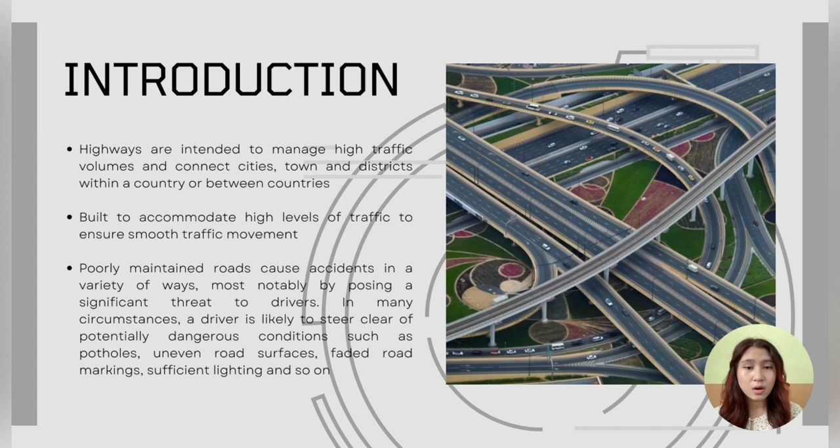But as we all know, damage to public transport infrastructure can impede its efficient operation and contribute to traffic accidents. Poorly maintained roads cause accidents in a variety of ways, most notably by posing significant threats to drivers. In many circumstances, a driver is likely to encounter potentially dangerous conditions such as potholes, uneven road surfaces, faded road marking, and insufficient lighting. These flaws can cause harm and make driving conditions hazardous.

A wide range of materials are employed in the construction process of road highways, and these are examples of construction materials for highway roads. Asphalt, commonly known as bitumen, is the most frequent substance used for highway roadways. It is preferred for highways due to its durability, flexibility, and low cost.

Other than that is granular subbase, which is a naturally occurring or man-made building material used as a road subbase layer. Granular subbase works as crushed aggregates used in a granular form above the subgrade layer beneath the base. Next is cement stabilization. It is particularly beneficial for coarse grained soils, mixing subgrade dirt with cement and water to strengthen its strength.

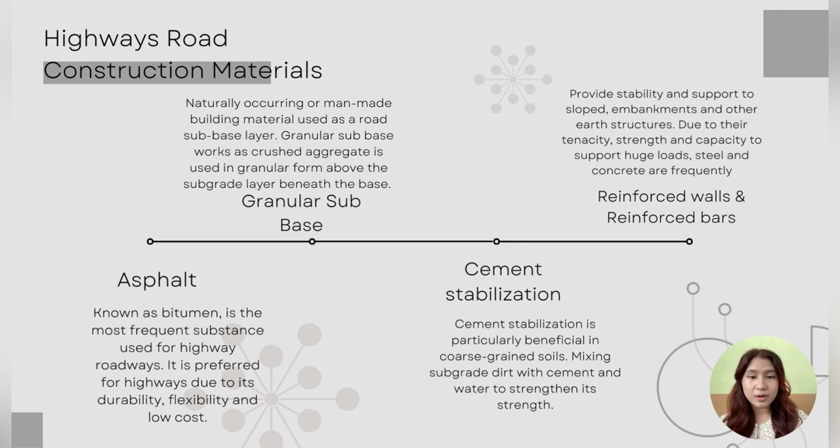Next is reinforced wall, which are construction materials that provide stability and support to slopes, embankments, and other earth structures. These walls are normally made up of three parts: fixing material, reinforcing element, and backfill materials. This boosts the tensile strength and crack resistance of the concrete, as reinforcing steel rods or rebars are placed within the concrete.

For this slide, highway infrastructure innovation relates to Sustainable Development Goal (SDG) strategy. Highway infrastructure plays a vital role in achieving sustainable development goals by contributing to economic growth, social well-being, and environmental sustainability. Here are some highway infrastructure innovations that relate to SDG strategy.

Firstly, sustainable material. The use of sustainable materials in highway construction such as recycled aggregate, reclaimed asphalt, and environmentally friendly binders contribute to SDG 12, responsible consumption and production. This material reduces resource consumption, minimizes waste generation, and promotes circular economy principles.

For the second point, energy efficient lighting: incorporating energy efficient lighting technologies such as LED lights in highway infrastructure helps achieve SDG 7, affordable and clean energy, and SDG 13, climate action. LED lighting consumes less energy, reduces greenhouse gas emissions, and improves visibility and safety on the road.

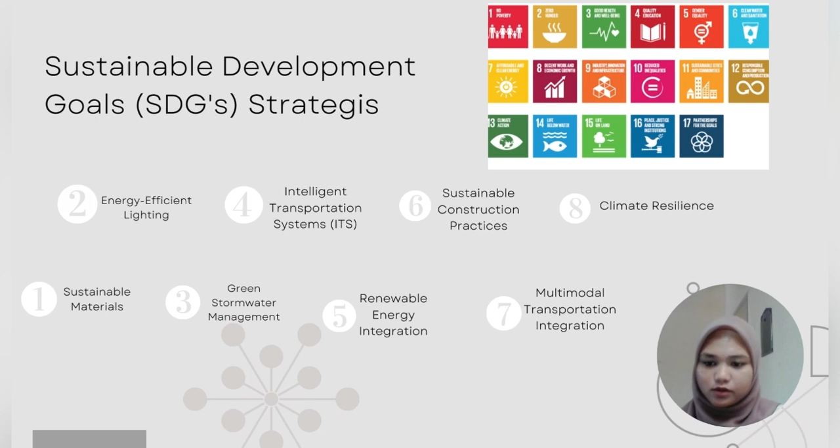Next, green stormwater management. Implementing green stormwater management techniques such as bioswales, rain gardens, and permeable pavement support SDG 6, clean water and sanitation, and SDG 11, sustainable cities and communities. This technique helps filter and treat stormwater runoff, reduces water pollution, replenishes groundwater, and enhances urban biodiversity.

Number 4, Intelligent Transportation System (ITS). Deploying intelligent transportation systems, including smart traffic management, real-time information systems, and vehicle-to-infrastructure communication, contributes to SDG 9, industry innovation and infrastructure. ITS improves traffic flow, reduces congestion, enhances road safety, and optimizes transportation efficiency.

For point number 5, renewable energy integration. Integrating renewable energy sources such as solar panels and wind turbines into highway infrastructure aligns with SDG 7, affordable and clean energy, and SDG 13, climate action. Renewable energy generation along highways can power infrastructure facilities such as lighting, toll booths, and electric vehicle charging stations, reducing reliance on fossil fuels.

The advantage and main characteristic of thermoplastic road marking in Malaysia, we have 3 main characteristics. First, robustness. Thermoplastic marks stand up well to high traffic, harsh weather, and wet conditions. They are made to survive Malaysia's tropical climate and keep their visibility for a longer amount of time.

Second, retroreflectivity. The thermoplastic material has retroreflective qualities because glass beads are integrated into it. This means that the mark reflects light back to the motorist when headlights or other light sources illuminate them, improving visibility at night or in low light.

Lastly, quick application. Because thermoplastic marks can be melted and applied with specialized equipment, they may be applied more quickly than traditional paint. By doing this, installation-related road closures and traffic jams are reduced.

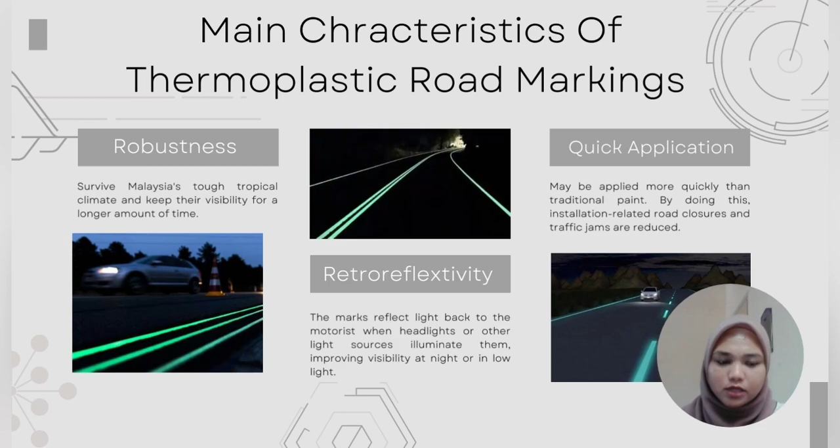Now I can explain about reduce, reuse, and recycle. Reduce: first, use solar or LED powered lighting systems with low power for the glowing line. This solution uses less electricity, lowering energy costs and having less impact on the environment.

Second, employ efficient design. Strategically place and space the luminous line to maximize visibility while reducing their overall length and material usage. The resources needed for installation and maintenance are decreased as a result.

Reuse: first, reinstallable material. Pick luminous line components that can be quickly removed and replaced in case road adjustment or repair are required. This enables the reuse of the same material rather than their replacement and disposal.

Recycle: first, give priority to use of material that can be recycled after their useful life. For instance, use material like metal or plastic that can be turned into new goods, eliminating waste and fostering a circular economy. Second, implement infrastructure and procedures for the collection and recycling of glowing line material once they have reached the end of their useful life.

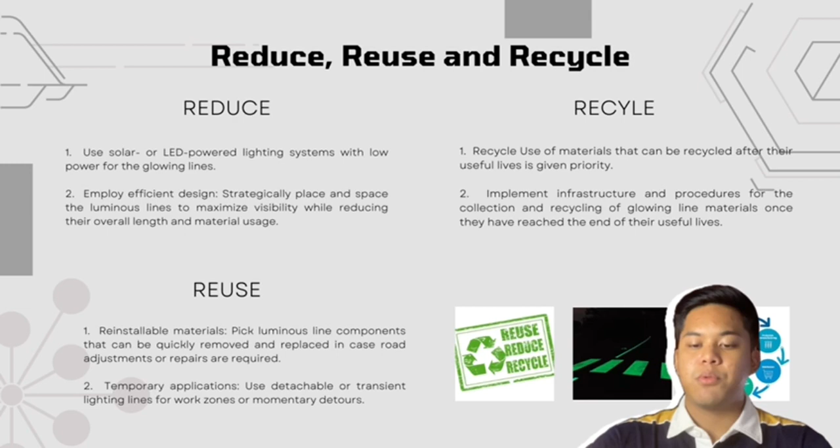This makes sure the waste is disposed of properly and promotes recycling the resources for later use.

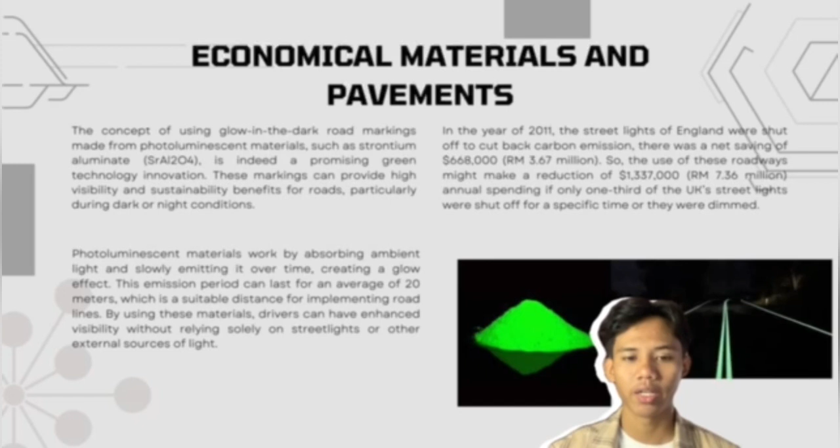For economical materials and pavement, which is MT3, the green technology innovation is to have road markings that are highly visible, eco-friendly, and can bring sustainability as well.

A glow-in-the-dark material is convenient for having the unique capability to emit light long after the excitation has ended. By using strontium aluminate compound, glow-in-the-dark material, also known as photoluminescent, can be obtained. The composition for the photoluminescent material is formed from the composition of alkaline earth aluminate.

Photoluminescent material absorbs ambient light and then slowly emits light. The average visible light emission period is in an acceptable range, which is 20 meters. This is a suitable distance to implement the road line because of the high visibility on the road during dark or night.

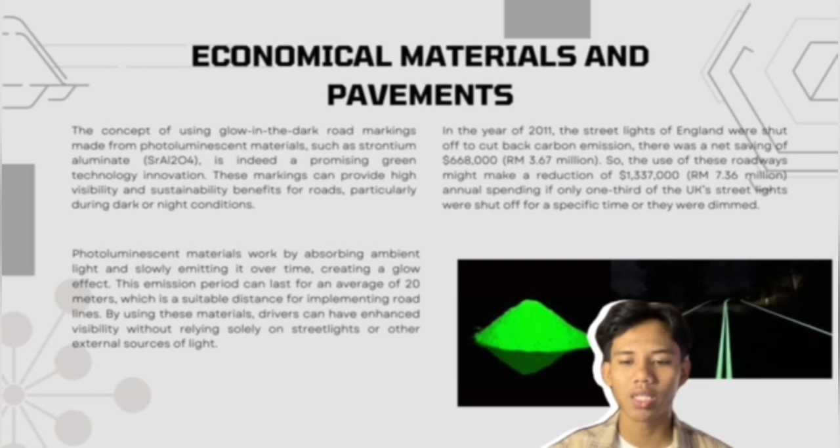Within the year 2011, when the street lights of England were shut off for a night to cut back the carbon emission, there was a net saving of $668,000, which is around 3.67 million ringgit.

So the use of these roadways might make a reduction of $1,337,000, which in ringgit Malaysia is around 7.36 million ringgit, in annual spending if only one third of the UK's street lights were shut off for a specific time or were dimmed. However, the cost for photoluminescence can vary depending on the quantities used during construction.

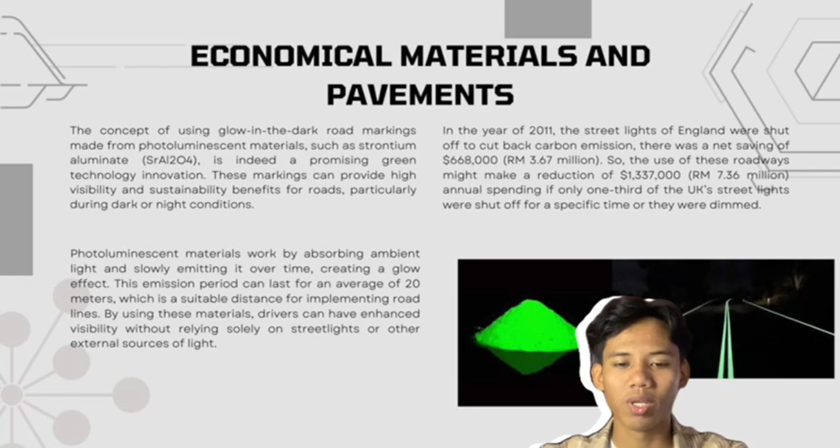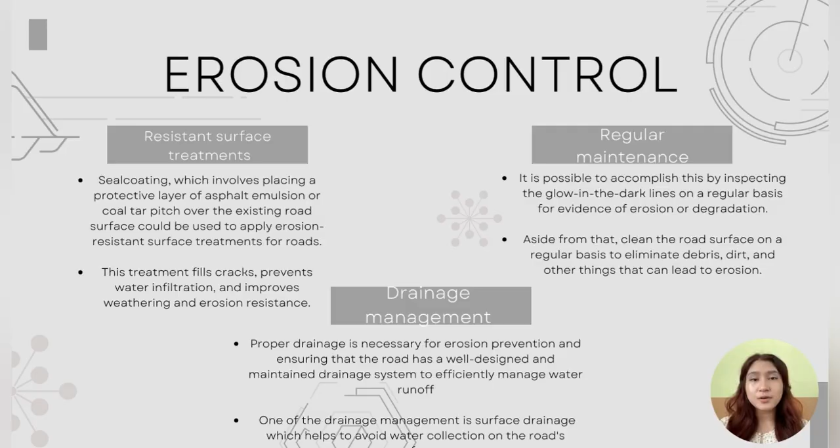In conclusion, the implementation of glow-in-the-dark lines on roads in Malaysia will improve visibility at night, enhance safety, and assist drivers in navigating more effectively. Okay, that's all from our group.